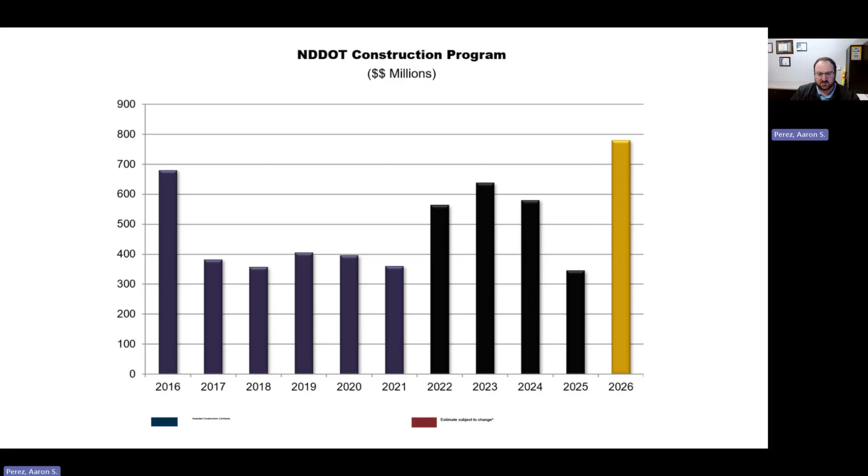Here are a few slides just as a general hot mix asphalt update in North Dakota for 2025. We had about 1.4 million tons of asphalt bid in 2025. Now, there is a caveat to that. Many of those large federal discretionary fund projects were bid in late 2025 to be constructed in 26. So they do inflate the numbers, and it isn't exactly what's put on the road in 25.

Of the total tonnage bid, about 42% of it is being utilized with RAP, or recycled asphalt pavements, in the mix. And now looking at what was actually put down on the road in 2025, the average RAP on those projects was about 20%.

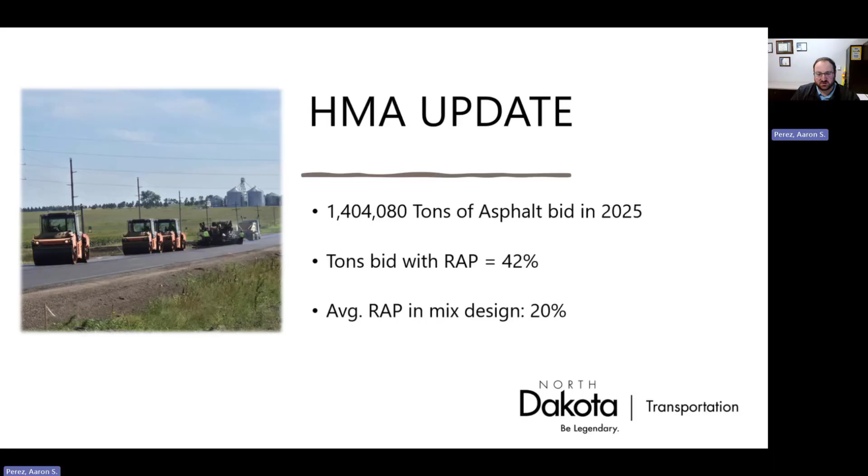Binder grades used. The majority was a 58H-34. In total, the -34 oils was about 86% of all the mix that was put out in 25. There is a reason for this, and I'll go over that in a later slide.

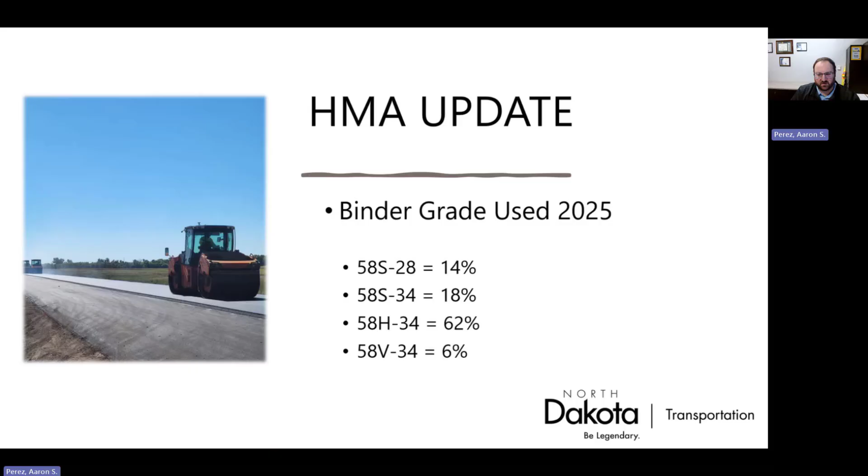Going over the density results of 2025 and comparing them to previous years, we hit personal records with both mainline density and longitudinal joint density. The mainline density increased to an average of 94.3%, again, personal record, while our longitudinal joint jumped to an average of 93%, personal record. Compared to previous years, there's been a general trend of increasing density from each year onto the next.

That being said, I'd like to thank our contractors for both our mainline and longitudinal joint density averages and increases over the years. Especially when you look at longitudinal joint density, 93% just a few years ago would have been seen as a fantasy. So thank you, contractors, for your investments in our efforts and your efforts in increasing our density numbers.

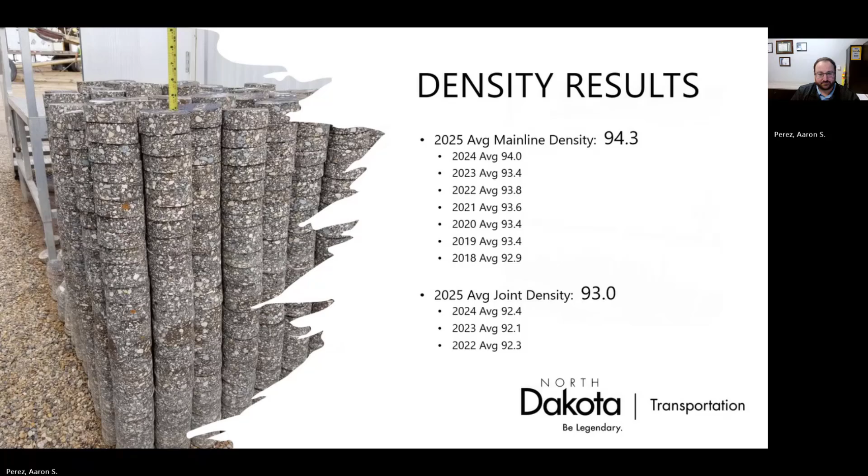Getting into incentives in 25, for our ride incentive, we were just under $200,000 that was paid out. We had an average MRI of about 43.6. Just wanted to note for ride, this is not on every HMA project. We place a special provision on projects that meet a certain criteria. And that being said, we only did a total of 6 ride jobs last year, which compared to previous years is quite low.

For mainline density, our average pay factor was 102%, which falls into our second highest pay band when you're looking at the 430 portion of the spec book.

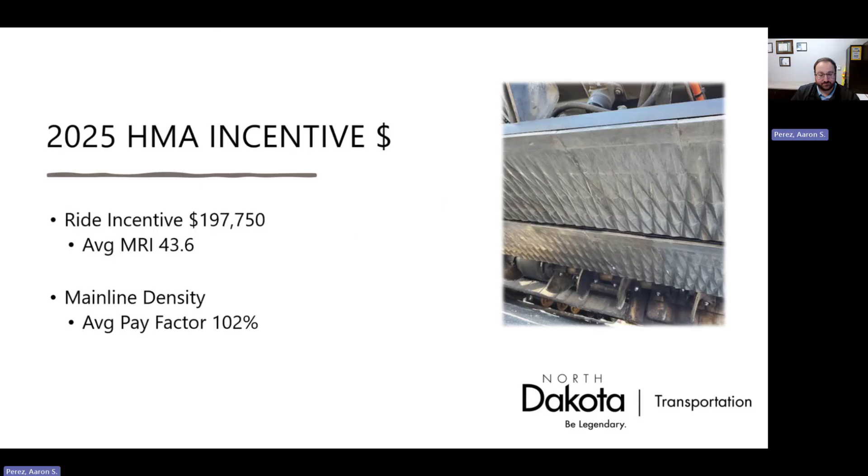Pilot projects completed in 25. A few things we did were intelligent compaction, paver-mounted thermal profiler, percent within the limits, high RAP, which for us in North Dakota is considered 35% and required the contractor to meet that. And this project also had percent within the limits. We have done previous high RAP jobs, just not with PWL also associated with it, and then a machine guidance milling job.

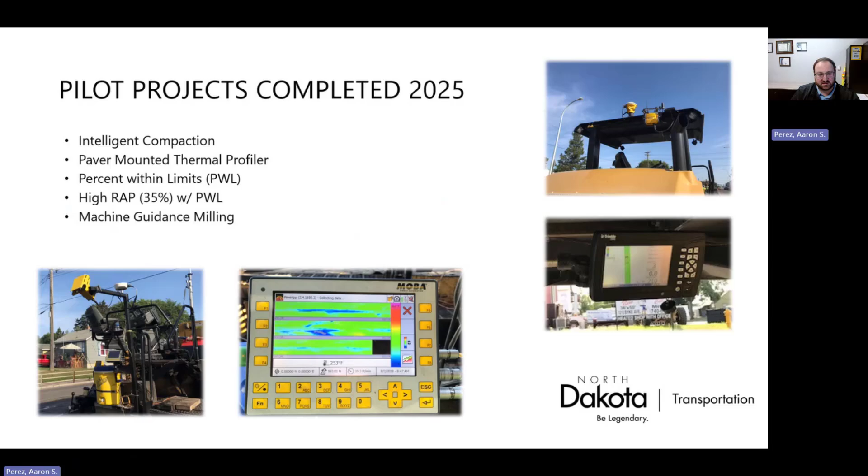Pilot projects upcoming and planned for 2026. Again, more intelligent compaction, paver-mounted thermal profiling, and percent within the limits. These 3 topics are used as special provisions, but we're actively trying to put together guidance so that we can now automatically place these on projects that meet certain criteria, and also just be placed where the district would like it. More to come on this as we come up with more guidance.

We are doing another high RAP with 35%. After doing a couple high RAPs, the performance testing went as we would have thought for a mix with high RAP. For the next one, we're hoping to open it up to the use of rejuvenators and performance testing at mix design, as well as looking at guidance that targets AC content at mix design. And then we have an FDR with emulsion job, and I will talk on this here in a few slides.

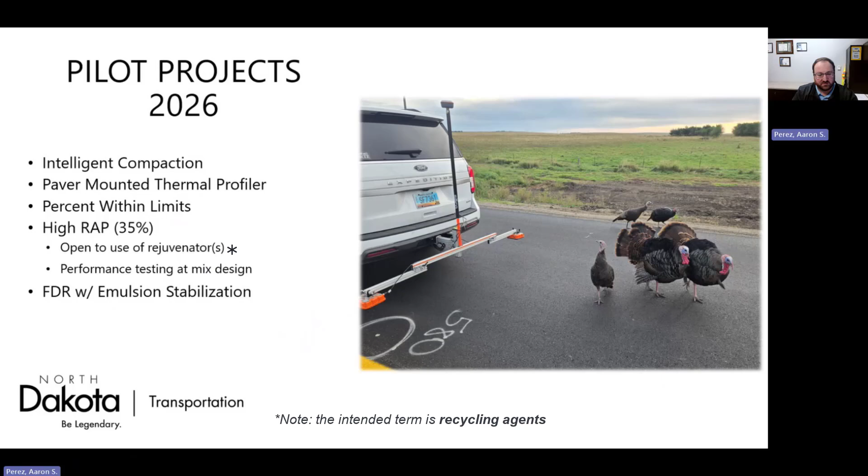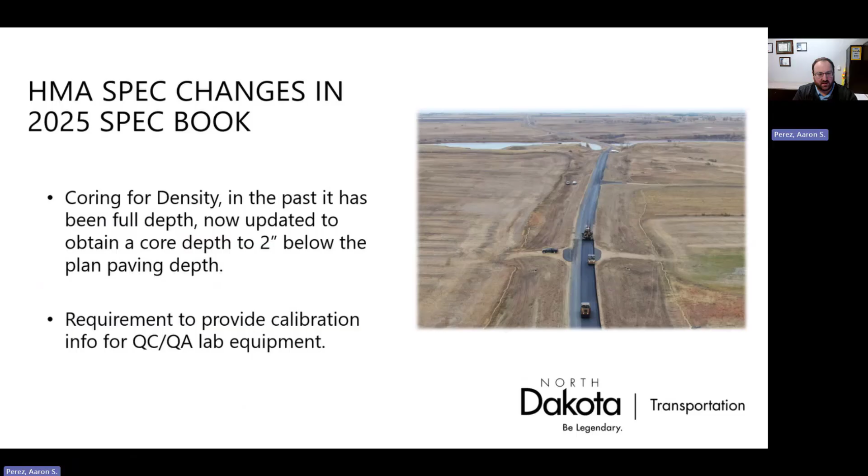A couple of spec book changes in the 2025 book. The coring for density in the past has been full depth, now updated to obtain a core depth to 2 inches below the planned paving depth. And then also a requirement to provide calibration info for QC/QA lab equipment. In the past, this was not a requirement.

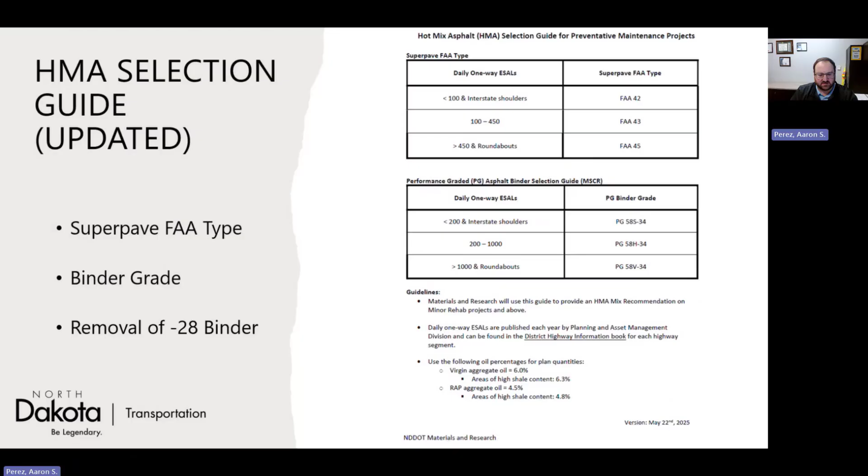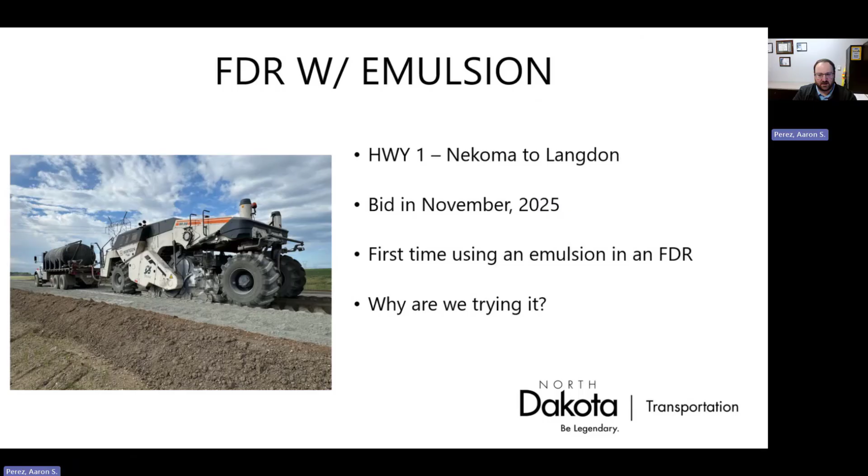Highly modified asphalt. So this all started in Utah with the Utah DOT. They started using HiMod in 2023. And in the last season in 2025, they actually put out around 500,000 tons of HiMod asphalt in their state. As I said, they're seen as the creators of this. They've been reaching out and doing webinars and talking to other state DOTs, and we've been trying to learn from their experience. Montana DOT did their first project in 2025, and they already have more planned on the way. We've been in pretty direct contact with them and learning from their experience for when we'd like to try this.

This is just a national level topic right now. It's really hot. We've been hearing great things from, again, Utah, Montana, and also industry like NCAT, and just looking at the feasibility of using this mix and many other positives gained. So what type of roadway are we looking for in North Dakota? Something with high traffic would be a start, maybe targeting an interstate overlay on existing concrete. We are looking to see if we could find something to construct here for the 2027 construction season using our first HiMod.

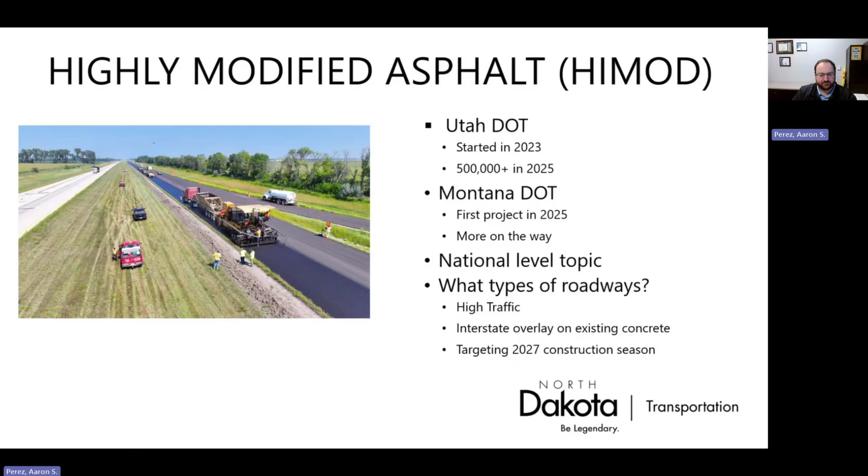So we're part of a pooled fund, the Demo to Advance New Pavement Tech. In this pooled fund, we're partnered with NCAT. Since we built the test sections for field verification in 2024, we're now on to the last portion of this pooled fund, that is to develop BMD specifications and implement through pilot projects. The plan is to put together a stakeholder group, which has already actually been done, similar to what we did with our validation project in 2024, and to work with NCAT on the development of BMD specifications. So as I said, as of today, that group has already been assembled. Our hope is that our benchmarking efforts will assist in this. We've been benchmarking now for a few years. And as of right now, we're targeting pilot projects to be built in 2027 as well.

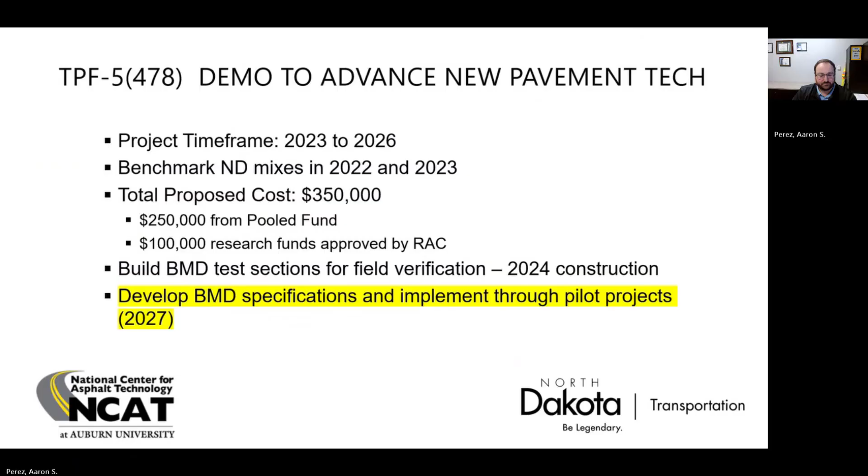I just wanted to touch here on intelligent paving technologies in general. To highlight a project done in Grand Forks in 2025, one project had intelligent compaction, paver-mounted thermal profiling, e-ticketing, a dielectric profiling system, which is for research purposes only, and a tethered drone with a thermal camera, again for research purposes only. Special thanks to Kurt Dunn and John Stork. Kurt's been our resident VEDA expert, which is the tool used to put all these technologies together into one place and analyze. He's put a lot of effort towards analyzing these different technologies and finding trends and is very passionate about it.

And John Stork's been in charge of our research efforts with our dielectric profiling system and helping advance the technology through another pooled fund we're part of with NDDOT. Our plan is to continue to use these technologies and advance with the industry, but it's pretty great to see all these things on one project and to be able to analyze the data that we see.